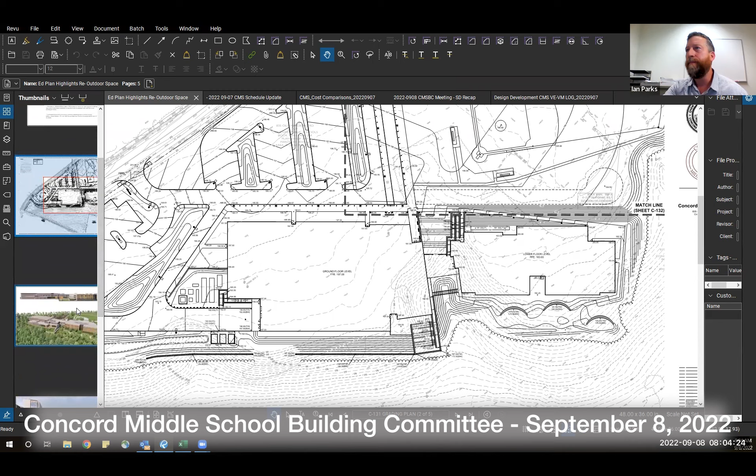One other example, and then we'll decide if we need to talk more on this. We have an outdoor concert annually at the high school where the band is set up outside, and the audience is staged on the pseudo amphitheater we have there. We were certainly hoping to replicate some of that at the middle school and have those opportunities.

Through the chairs, if I might. Chris's hand is up too, I noticed. Oh, sorry, thank you, I lost track with the screen sharing. So it was Chris and then Court?

Yes, Chris. Just to clarify what Lori's talking about: right now we're looking at a depiction of an amphitheater, a space that runs continuously from upper to lower. By contrast, if you had an upper space that were level, assume it's filled and level, and then you don't have the pass-through, you'd go through the building to get to a lower space. So for people to see the concept, we're looking at an amphitheater that goes under the bridge versus possibly an upper space that's level and a lower space downgrade on the backside of the bridge. Am I generally thinking about those possibilities correctly?

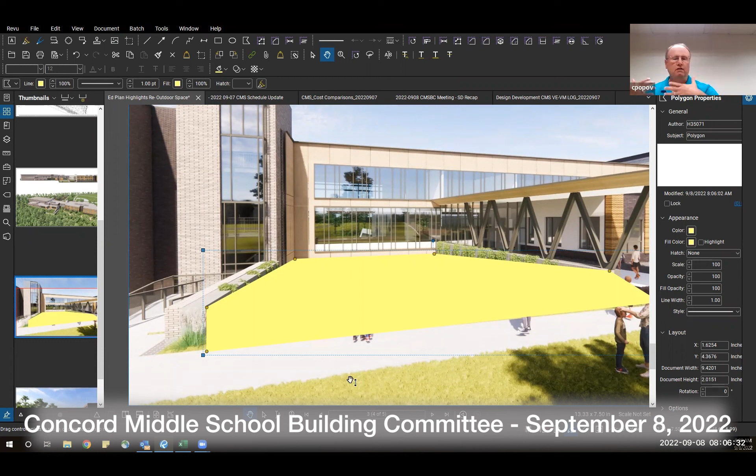And yeah, it's a very different concept from something where you get to pass beneath the bridge and have movement, or as the architects like to say, communicating from the front and back of the building via beneath the bridge.

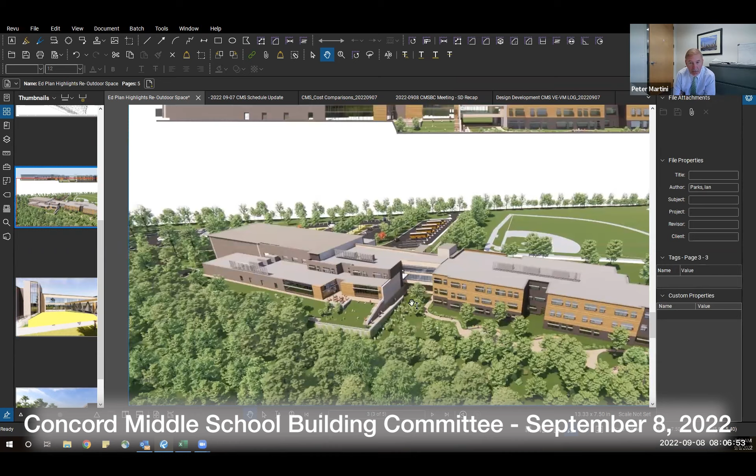Ian, if I may, I think Chris was also talking about the back sides. This is the front side. And so we need to, well, I think there's three things we need to make sure we're talking about with this.

One is, if we decide to fill in that space, and I can talk a little bit more on that, are we going to replicate what is right now needed for the ed plan out back? So it's going to be value engineering of that.

So that's number one. Number two, I think Lorraine's going to really need some direction here, because it's interesting to hear that space—we might be thinking of using the space under the bridge for square footage of the building, which means we would have less square footage somewhere else on the building, which now Lorraine's looking at kind of redesigning the real workings of the building.

And there's a lot of ways to do that when you start moving square footage around. I think that's hard, so I think the committee needs to let us know how many options we want to be looking at here, because that starts to get into a whole new design.

So what I would say is, again, if you want to get us a number on this, this is not a real difficult situation to do with some elevations and some structural information from Lorraine. Our independent estimators can put together a price on this.

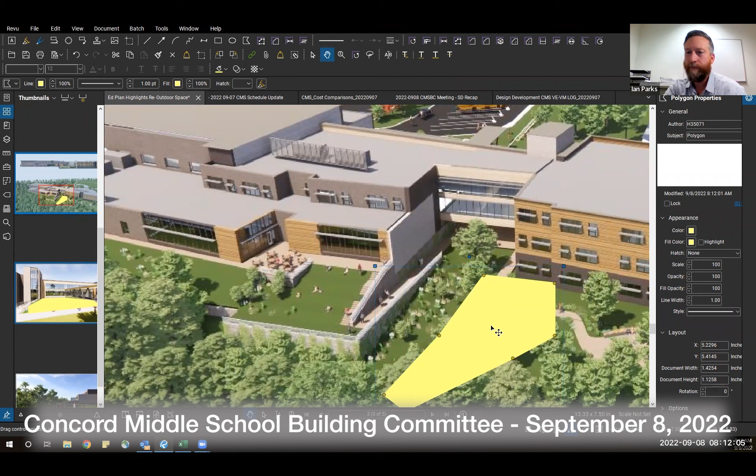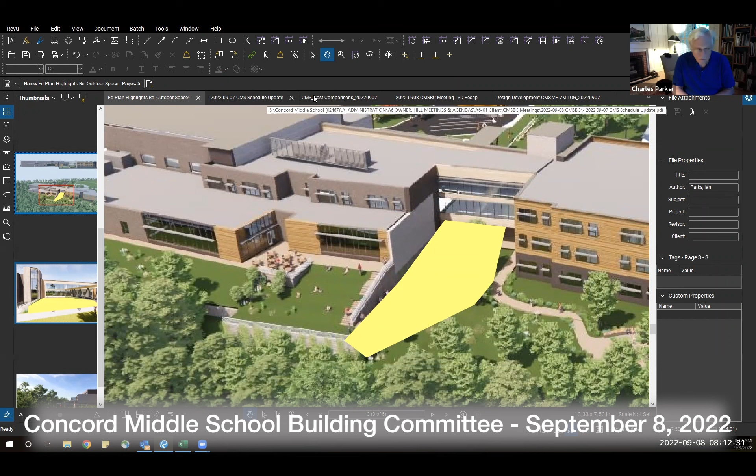Charlie, yeah, there's a couple of things to also consider when this analysis is done. One is there's an exit door from the instructional wing at the ground floor, and a decision would have to be made whether to retain that. Were you to do that, you'd have to have an interior wall probably under the connector that would enable that door to operate and have an exit way to get through there.

Second, I don't know that we've ever really discussed the seating structures in the amphitheater area. That's always been presented as a grassy area that goes down the hill and kids will go in there. Maybe that was discussed and I don't recall it, but it would be good to understand what's going on with that and what the cost impacts are of eliminating those expenses were we to fill the area and look for a different solution.

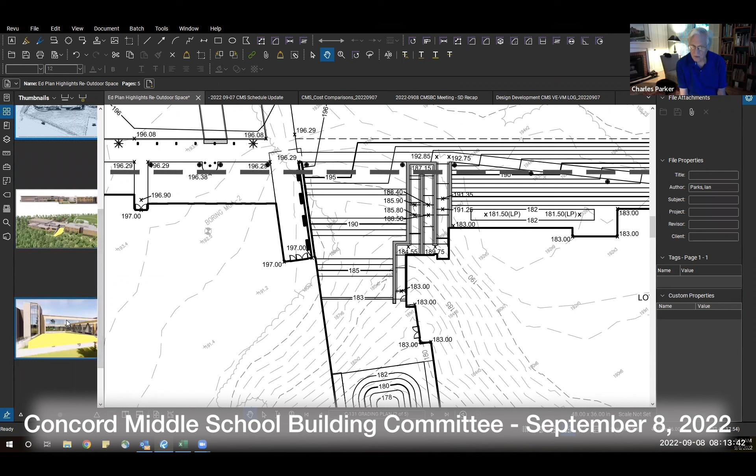In other words, you've got these bleacher seats, not sure what's underneath them. It looks like there's grass on them, but it really couldn't be grass, that probably wouldn't work. So what is there? How is that structured? Lorraine, can you speak to that?

As far as the proposed design? Charlie asked whether it's grass or concrete underneath. Sorry, Charlie, I think your audio isn't working, I can see your mouth moving but I can't hear you. We'll give Lorraine a minute. I'm here, I can answer any questions about that area. Charlie, could you repeat what you're looking for? He was asking what the actual material of the seating and the vertical members holding it back are, I believe, Charlie.

So this is just simply a lawn terrace. We add fiber to the soil material in order to get that sloped area, that sort of 5-to-1, 6-to-1 slope where it terraces down. So it's literally all just a lawn slope area, there's no structure necessary or involved to create that lawn terracing that you see here and also in the back area. So there are no bleachers. That's correct, no bleachers.

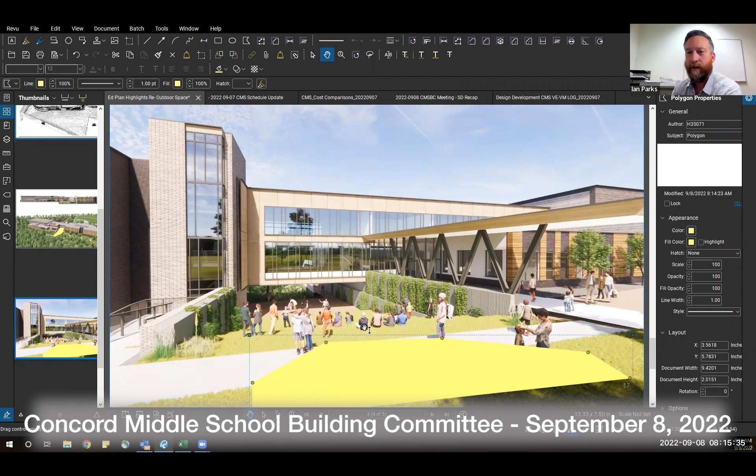Can you hear me now? We can hear you now, Lorraine. A grass slope, which is a pretty simplified design. That's correct, that's accurate, it's like sitting on a grassy hill. Exactly, you could have integrated tiers, integrated steps, concrete retaining walls, things you're not seeing here. Again, a slope down is a pretty simplified design. That's correct.

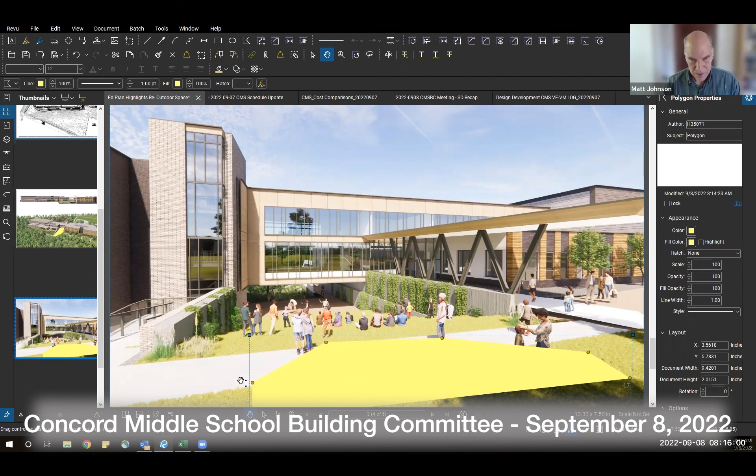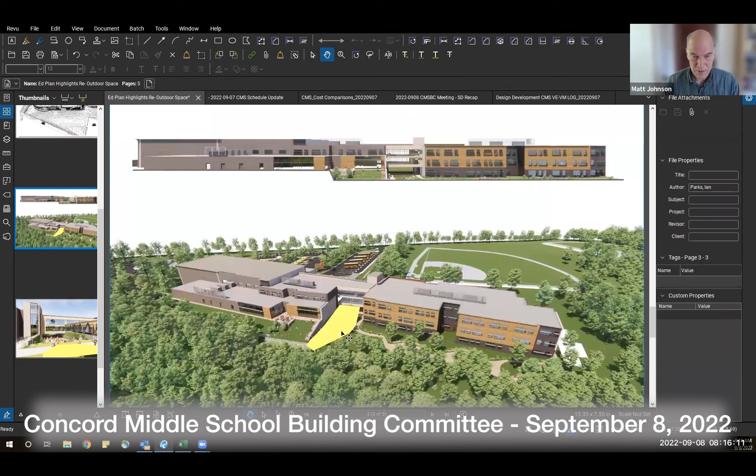Matt Johnson, thank you for clarifying the design. Team, what I was imagining was that space, rather than filling in and requiring a lot of fill in the back, if that lower area was usable building space, it could be quite a large space. You could see it extending out beyond where the bridge is now in the back. It could actually simplify the access from the cafeteria, the door out to the back, all that stuff.

I don't want to be an architect here, but I'll just say it, I think it could be cheaper than putting it on grade to actually create space under there and take space from somewhere else, because you already have the grade that's going to open up that story of building that could be put there, right in the middle of the building, where it's accessible to all kinds of different activities.

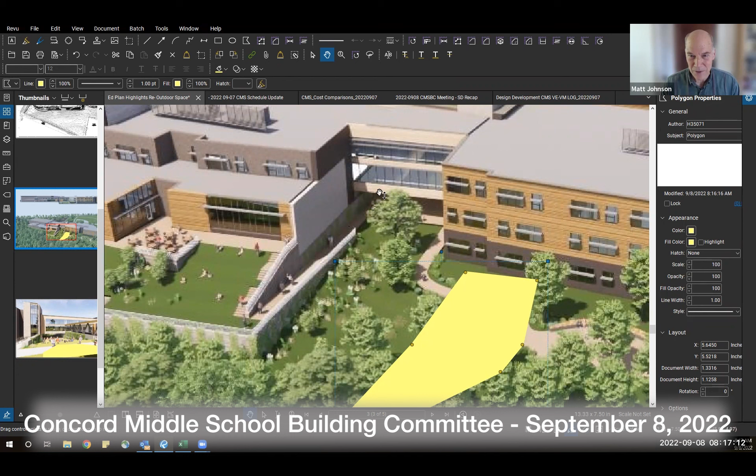And then the amphitheater could go behind it if necessary, grass amphitheater. I do wonder also under the bridge—because of course it's total shade, it wouldn't be grass under the bridge, right? So you've got grass coming down in the front to the bridge, but then under the bridge, what is the treatment there? It's going to be high traffic and low light.

Yeah, it's concrete only. This is concrete. Yeah, just sidewalk concrete, for lack of a better term. Okay. I just, people need to know what that's going to look like, I guess.

So Matt, if I can get some point of clarification here. We've got two alternatives that the committee seems to be talking about. One is just filling it in and not having the walkway under the bridge, changing some of the retaining walls. But the other is, Matt, it sounds like you're proposing that we take space from somewhere else in the building, square footage from somewhere else in the building, and move it underneath the bridge. So you're adding, let's call it the nurses and the offices or a music room or something underneath the bridge. That kind of space.

Yeah, and again, it could be deeper than the bridge because it could go out to where this wood bridge is, if you will. I don't have the expertise to know. That's really what I'm fundamentally getting down to—our VE and VM so far have been little things here and there. I'm just trying to say, what are the creative design alternatives that could really change the game a little bit here? This is one.

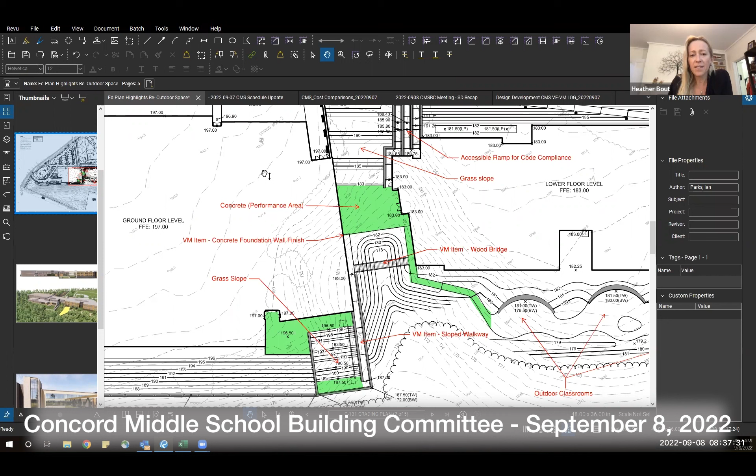I was just going to weigh in on the question you asked, which is, should we be relooking at this? And I guess I keep coming back to the fact that time is money. Lorraine or Ian, please correct me if I'm wrong, but I thought throughout this conversation we've heard from both Hill and SMMA that it didn't seem likely that re-looking at this was going to end up a big savings. So I feel like spending a lot of our time and money now on them redoing it for something they don't think is likely to save money, I'm just not sure that's a good use of time, added to the fact that, as we heard from Lori, this is part of the ed plan.

I want to be very careful that it's one thing to say we could have a performance space, but not have it sloped. If we just have a small flat grass space, it's not really a performance space because you can't see the performers. I want to be careful about protecting what we've agreed to protect in the ed plan. I think Steve's comment made sense to put this on the list of things we'd look at in detail if we have to bring the budget down to 102 again. But I don't feel like we're going to get a lot out of putting time and money into redesigning this now. Lorraine, Ian, Peter Martini, correct me if I'm wrong.

When we first started this conversation, it was what would this area look like if it was filled. Running through the logic of that is exactly what Peter was alluding to: you're now taking an existing sloped area and filling it, so you're spending money to fill that area and spending money to put in foundations underneath the bridge. Thinking through the estimating side of it, it's probably a fruitless exercise. It's probably a cost neutral change in our minds without having the estimators involved and actually doing the legwork.

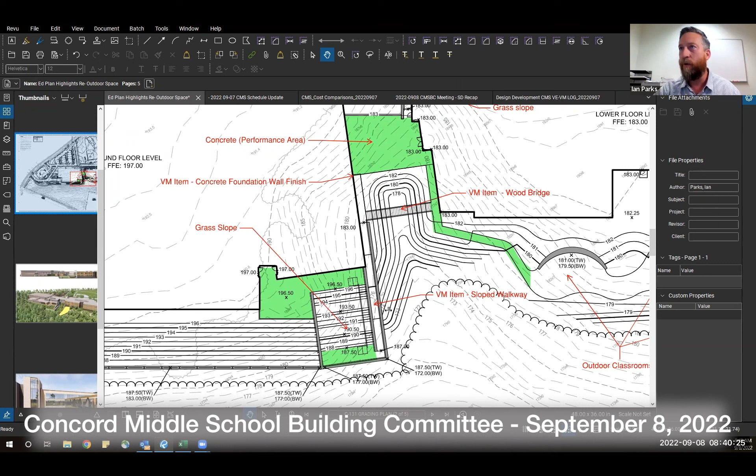So the alternative is keeping the space as is or modifying it to some degree. We can go through all these features—if you're going to keep a sloped walk here, which is a very simplified grass hill, there's not too much to change. You have to keep the accessible ramp for code compliance, so you can't really change that if you're going to have a sloped area. This is intended to be the performance area, and that keeps the integrity of an outdoor space for use. Looking at value management, some of the initial thoughts were removal of the wood bridge, removal of the sloped walkway, and changing the concrete foundation wall finish. That was a start towards maintaining some of the space while integrating value management.

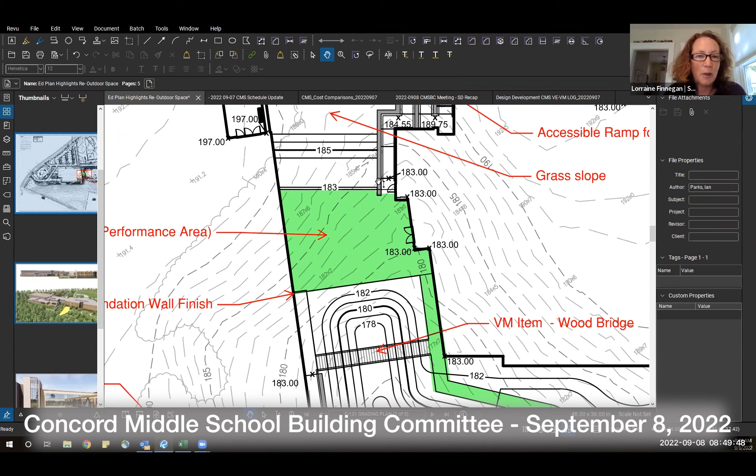We're not going to put the nurse down there. We're not going to put medical. Getting an ambulance down there if someone's injured is not what we were going to do. So you're not going to move. You need to keep guidance with the administrative suite. So there's adjacencies that are super critical for this project.

In addition to that, there's a special education classroom right next to it. So we're very intentionally not placing all the special education in one area. There is a real desire, and we've reviewed this with CPAC - this is the way the MSBA works, this is the way DESE works. You have to distribute those spaces.

So just quickly looking at the plans, I had a couple of ideas, but I really would need to meet with Laurie and Justin and make sure that anything I propose down there is something that's acceptable to them.

But Lorraine, where's the money? Where's the savings? Well, I have to carve that square footage out of the building. Right, so that's why I'm saying it's a jigsaw puzzle. If I'm taking a piece from over there, I have to put it over here. So there's no savings of square... sorry, there's no difference, there's no savings of square footage.

It's the same square footage. It's just, to me, building something someplace else. So the issue here is: is it less expensive to build that on grade? That's where this started from.

Okay, I'm going to ask Matt Johnson to speak, and then I think our committee needs to vote. Yeah, I'm just putting that out there.

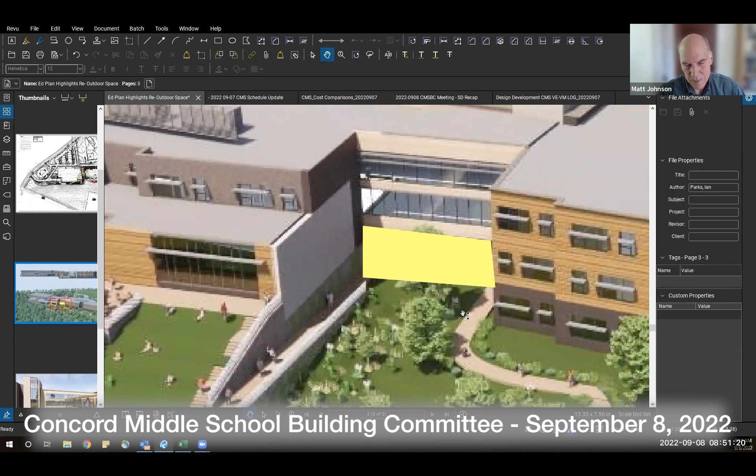Matt: My assumption is that structure that creates a contiguous building that follows the contour of the land like the rest of the building does there, and perhaps even could be bigger or deeper than the bridge itself at that level, would be cheaper than the equivalent space that included a bridge.

Because the bridge requires all these additional elements of landscape, ramps, steel to support the bridge, etc. You just make it part of a contiguous building all the way across, as opposed to two buildings connected with a bridge. And yeah, it has the same square footage, but now it's all just part of a contiguous building that per square foot, hopefully, would be less expensive than this.

Now, my goal is not to have a specific design. It's just to say, here are things that from a layman's perspective look like they cost more. And if they don't cost less to change, then that's not the right answer. It's just trying to say, what are the creative ideas - and not hearing a lot of other big ideas, I just threw something out there. Again, I would love to hear other creative ideas for design that would get us substantial savings. I'm just grasping at whatever straws I've got.

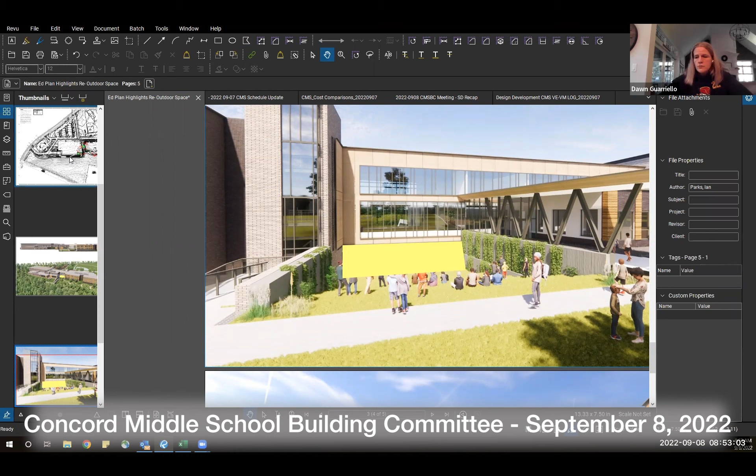I appreciate that, Matt. I'm going to ask if anyone has any motions that we might be able to vote on so we can move on from this, because we still have plenty to discuss today.

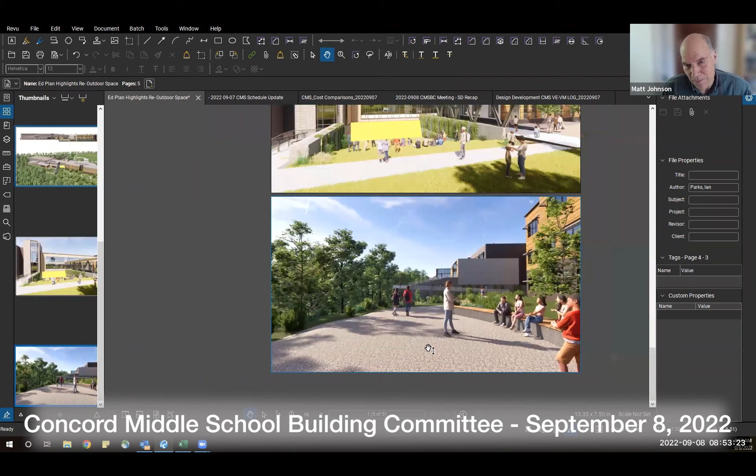Well, I guess I'm going to go ahead and just move what I would like to see, and if it's not supported by the committee, then that's fine. What I would like to do is ask SMMA, as they have offered, to explore a design option that would use the space currently taken by the performance space under the bridge, and perhaps some more, to displace space elsewhere in the building, with the goal of having a total lower square foot cost, and centralize some space that might be elsewhere in the common wing, in order to simplify the design and perhaps save money.

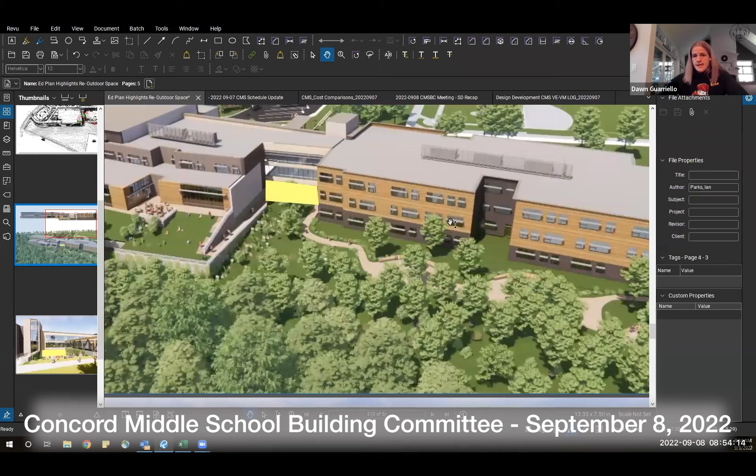Yeah, I'll second it. Okay, we have a motion and a second. Any discussion? Hearing none... oh sorry, go ahead.

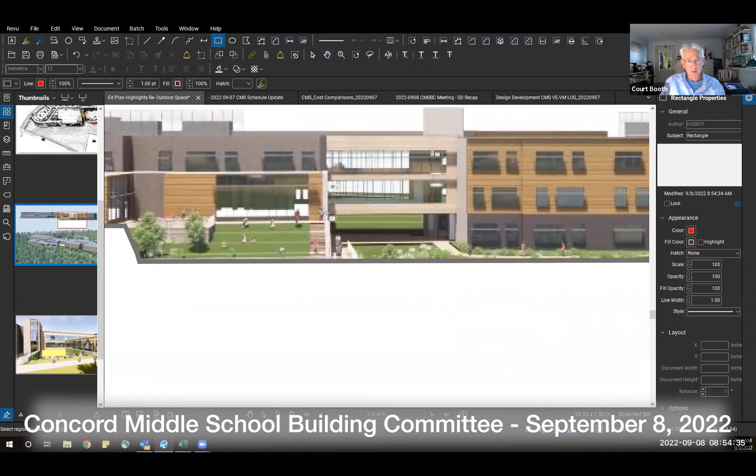I think it is a responsible move, in that we are in the conditions we're in, number one, and number two, that we, to Matt's point, simply don't have other good options at this point. And if this is the best one, I think we have a responsibility to really take a genuine look at it. Thank you. Thanks, Steve.

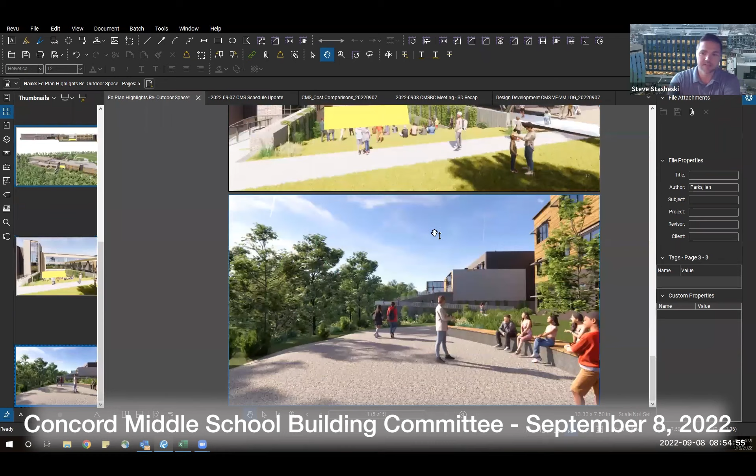My question would be to Matt in reference to the select board timeline. If we were to ask the professionals to discuss this and provide a sketch, review it with Lori, then send it to the estimators, then provide some kind of a price, I think that might take longer than our original timeline for the select board to vote on whether a town meeting would be supported. So if we move forward with this, knowing that the building committee is moving forward with looking at this and potentially other options to significantly reduce the budget, would you say there's a good chance the select board would continue with the existing proposed timeline in the warrant we requested, so we can keep the ball moving on both fronts?

Well, I can't speak for my colleagues, but all I can say is what we heard out of the select board meeting is they wanted to see a serious look at major VE. And I think voting for this would indicate that the committee is open to those kinds of discussions, so that would be encouraging. But again, I can't speak for what my colleagues will say. Thank you, great question Steve, and thanks for your response, Matt.

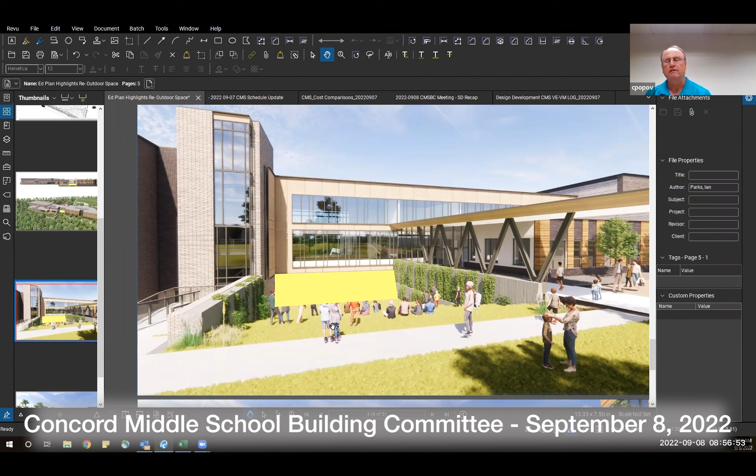Chris? Yeah, just for the discussion on this motion, given the possibility of this kind of build out beneath the bridge, which would effectively eliminate the bridge, would it make sense as an alternative to say, what if the only possible change would be to level the front, so there is no slope there? Yes, there's a fill cost, there's fill on site. So if the only thing to think of is we're not going to build anything beneath the bridge, we'll leave that open for the rear part of the house, as it were, and then have that front area all level -- does that make sense? Does it add much more work, or is it a reasonable alternative? Just something to think about.

I don't know if we want to amend the motion for that or put it as a separate motion. I'm just not sure what's the way to keep it clear. Well, I'll assume the motion will stand unless someone wants to revise it or make a second one. Chris, how's that sound? Let's get through the discussion and then we'll figure that out.

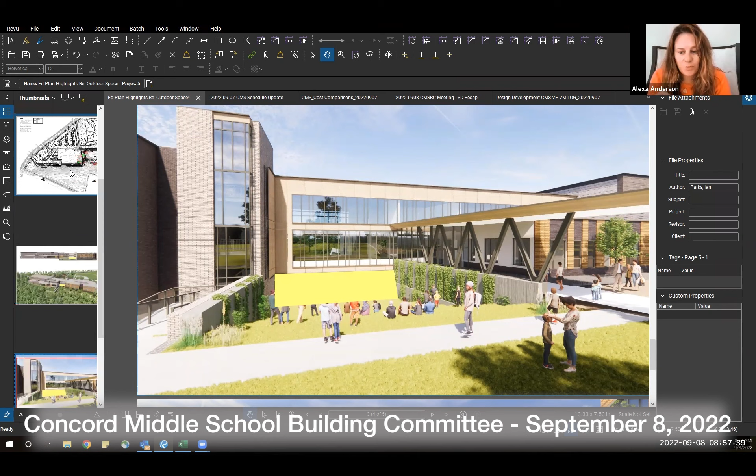Alexa -- my next question is, the part of why I feel like this is not a responsible path is we do have things on our VE list that would get us, if not entirely to the original budget, very, very close, and they are the gym and the auditorium. The superintendent said she would not go to bat for those spaces because they don't adversely impact her ed plan. So why are we pursuing something in a totally different direction when we do in fact have things on the value engineering list that will get us there, and they're on the community side of the building? So to me, that is at the crux of why I don't feel like this is responsible. I also feel like our professionals can't be more clear that this is likely to not save money. So those two things combined, I couldn't disagree more that this is a responsible route.

Thank you, Alexa. Heather? I'll be brief because I agree with most of what Alexa said. I just need to point out that I do not think voting to do this and redo it would be a sign of being willing to look at options. To Alexa's point, we have others, and I think we as a committee have been looking hard at options. I agree with what Pat said earlier about the fact that that effort has been going on and is continuing. This one, we're being advised by our professionals that this is not likely to be a money-saving option. In fact, to me, that means we are wasting money by wasting time and professional hours on doing this. So I feel it would be irresponsible to look at this option.

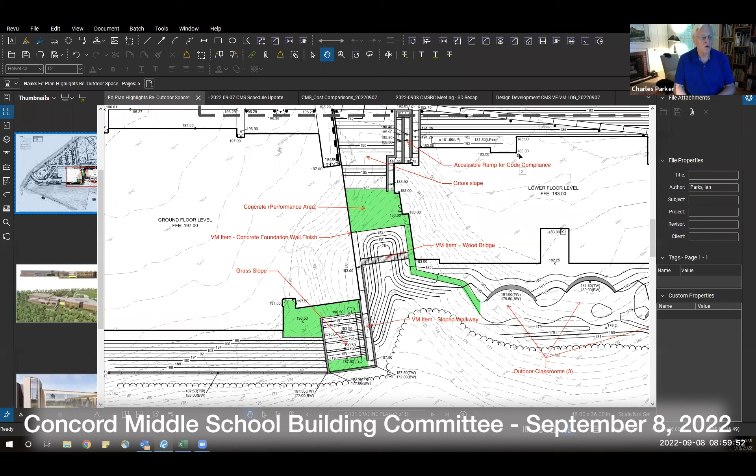I had a colleague take a look at this, an outside person who went to his own estimators on the whole concept. I didn't prep them with any information I had, I just asked, and they had all the detail, the slides, and went through an estimation process. And they said no, this is really not going to save any money. You're just trading one set of items for another. So no money to be had here.

So if we're doing VE, this is not a candidate. In fact, it takes attention and time away that we could be spending on other VE items that might be more fruitful. So I agree with Alexa on this point, and with several others who have spoken.

Great, thank you Charlie. Peter? Hi, yeah, I'm also going to weigh in there. The only question I have, to me, is this is a perception thing.

My question is, I guess, to Matt, is it something that the selectmen would view as valuable to have gone through this, even given the fact that we are seemingly comfortable that there really isn't going to be a cost savings from what we can tell? Is it important from a perception standpoint, given the bridge and that whole area, which seems to be an area where people think there might be able to save some money?

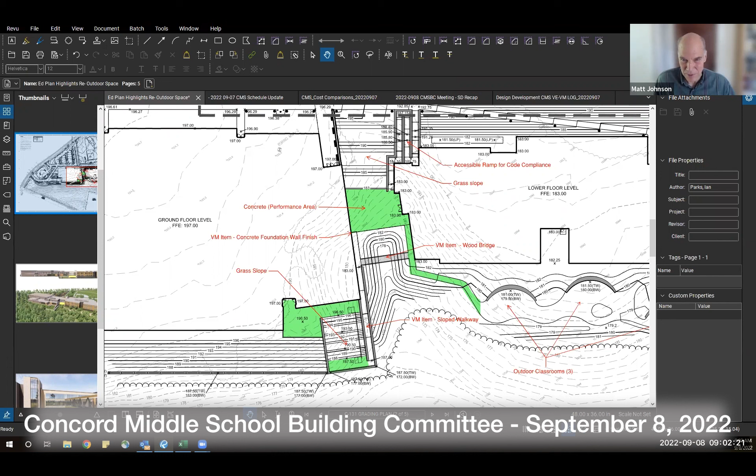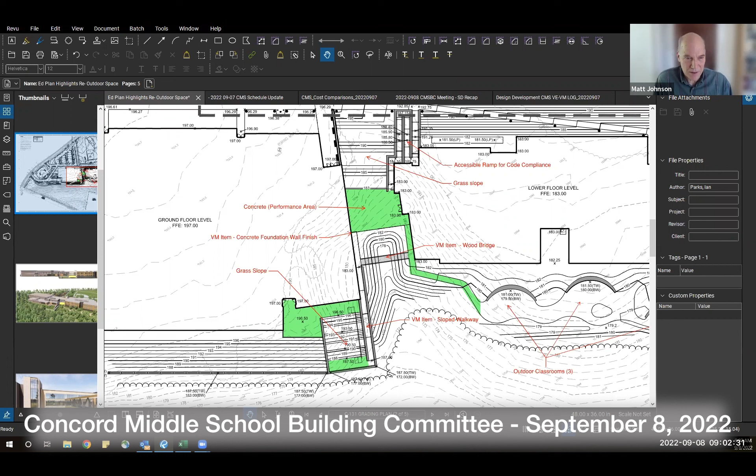I just believe that there should be something there. But if people are not committed to pursue that, then that's where we are.

Thank you, Matt. I'm going to call for a vote. I think we've discussed this substantially today. Alexa, how do you vote?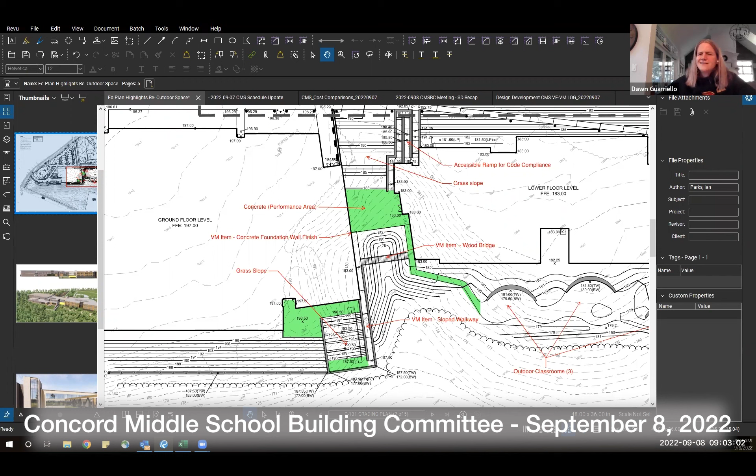No. No to studying it. Correct, no to studying it. Got it, just making sure. The motion was to ask the professionals to look at moving built square footage under the bridge as a potential cost saving simplification of the design. That's the nicest way to put it. It doesn't have to match the size of the bridge, it could be bigger or step out or in. So Alexa's a no still, I assume, unless I heard you wrong.

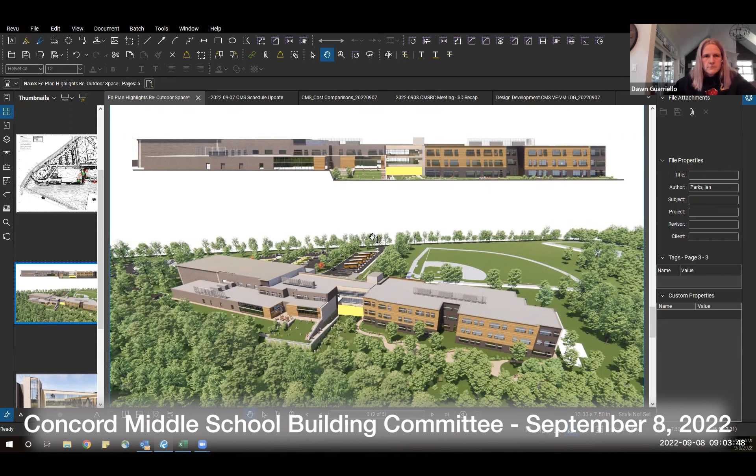Court Booth, yes. Heather Bout, no. I was going to keep track here. Frank Cannon, can anyone see Frank? Let me go look. Thumbs up or thumbs down, Frank? Thumbs up, thumbs down, Frank, talk to me. Down, did I see him correctly? Okay, you're a no, thank you Frank.

Who's next? Justin not voting. Peter Fishalis. No. Okay, I'm a no, only because I think I agree with our professionals that it won't save anything. I think we have other prudent options to consider here.

Lori Hunter, sorry I'm at the row so you're going to hear the kids. I'm a no. That's okay. And I know you need to jump off for a few, Lori. Yeah, I do for a few minutes. Yep, I understand. Matt Johnson, aye.

Okay, next voting member, Pat Nelson. No. Chris Popoff? No.

Charlie Parker, no. Matt Root, I'm a no, no. And Steve, no. Okay, looks like 11-2. The noes are in favor, or the noes went out.

Okay, so with that, I think we have a very long list of other things we need to get through today, but I appreciate everyone's comments, information, sharing of ideas. This is all very helpful and hopefully will lead to our building being successful. So thank you all for spending the time talking through that.

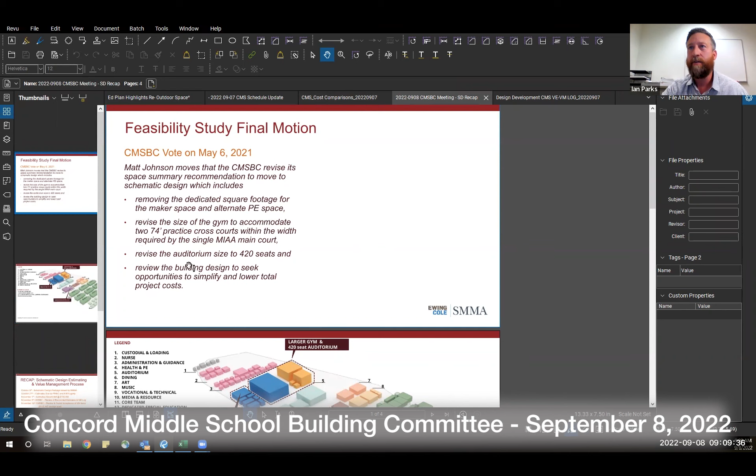Just to recap some of the things that went into that cost, some big decisions related to project scope. Back in May, at the end of feasibility, we were looking at some changes related to scope: removing the dedicated square footage for the alternate PE space, that was done; revising the gym size to create a larger gym for the 2 practice courts, that was done; revising the auditorium size to 420 seats, that was done as well.

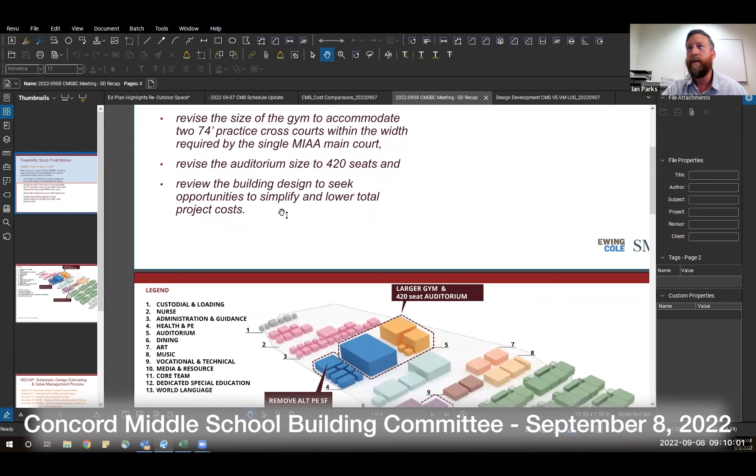And then, sorry, I skipped over, it's makerspace and alternate PE. And then just simplifying the building to try and lower total project costs.

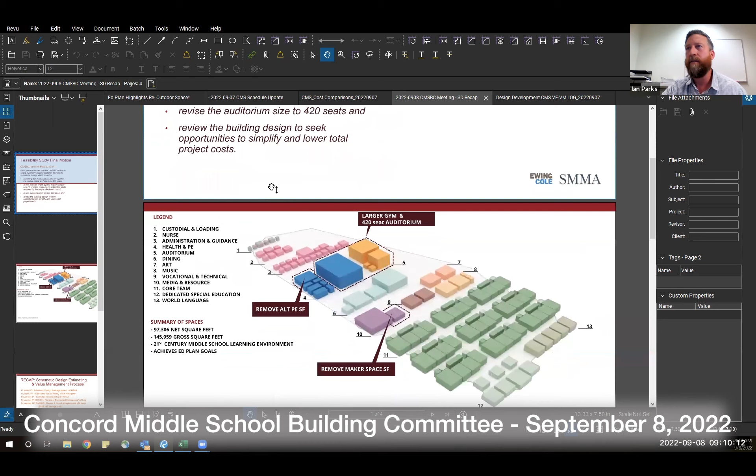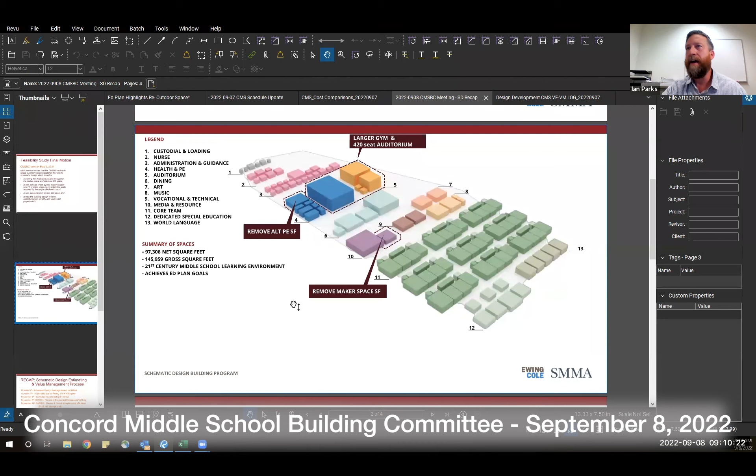So these were some of the areas, just to outline the summary of spaces that were changed at the end of feasibility. That was a long process of going through that, and you guys made some tough decisions last year.

Then we got the estimates back, and we went through the schematic design completion. We gave it to the estimators, had them do their due diligence, and then we went back to this idea of we're over budget and we need to get back to budget. So we did an additional value management exercise.

There were some savings realized on the November 12th meeting, and VM that was accepted, close to 900,000, over 900,000. Then some additional VM was accepted on the November 18th meeting. So we got that $1.7 million in savings total for schematic design value management.

Some of the highlights for that were stockpiling existing soils on site, reducing wood look metal ceilings, eliminating wood paneling in the media center, eliminating CMU walls in back of house spaces and gymnasium, reducing the roof screen coverage on the roof, and removing 934 gross square footage from the building footprint, which was in the gym area, and reducing height of glazing of the connectors. Some of those were the bigger value management items in that $1.7 million.

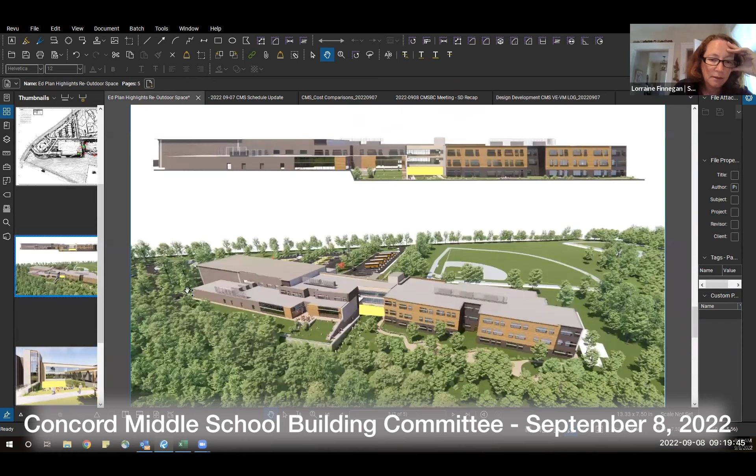Lorraine, can you go over this one again? This is the walkway feature? That is the south side of the dining commons - that's the ramp that goes down to the performance area we were just talking about. It's still in that rendering you showed earlier, coming from the dining commons down to that area. So it's eliminating the connection from the dining commons to the lower area - that's a big ticket item.

Reducing ceramic wall tile in the toilet rooms to 8 foot on wet walls only - so this is taking out tile and putting in sheetrock, impact resistant sheetrock and epoxy paint. This is 274,000, but it's a big change to the bathroom areas.

This one here is reducing the construction schedule by 2 months, and that is a savings realized of 270K for general conditions - just less time and management effort for an 18-month schedule in lieu of a 20-month schedule.

Reducing auditorium and specialty space by 25%, and the AV systems by 25% - so a decrease in your AV systems, that's 265.

This is a change to ceilings - changing wood look metal ceilings to tile, savings 189,000.

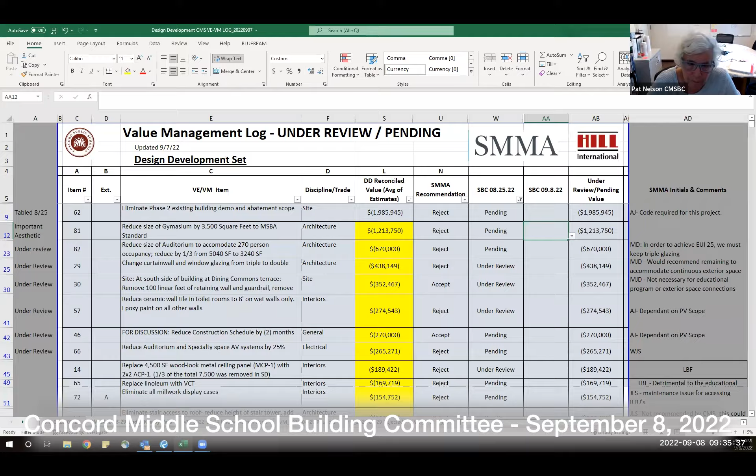Yeah, well, also I could imagine for 81 and 82 a more modest proposal of a 350 seat auditorium and a 7,000 square foot gym. Well, Matt, this is just it. We need to figure out what we want to represent to the town as our recommended strategy for this building. That's what we need to do. And it may be this number, it may be a different number. So we need to figure that out.

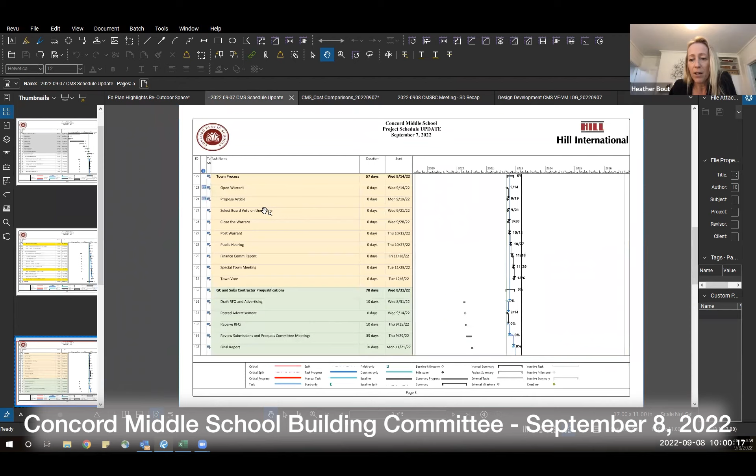But what I wanted to comment on was the upcoming select board meeting. Back to what I brought up earlier about timing—if the select board is discussing whether to start the process for town meeting now, I think it's important as a committee that we reiterate time is of the essence. If we don't know if the special town meeting is happening, or the process doesn't start soon and we can't move forward, this whole thing bumps back. Even one of the VM items could become not an option, because that's about shortening the time frame by 2 months. And if we're pushing things back because we can't have a special town meeting yet, we might have to be lengthening the time frame instead, which costs us more. So I wanted to bring up timing and see if we can reiterate to the select board that timing is critical for getting that special town meeting process started.

Thank you, Heather. I put up on the screen what we had for previous assumptions for the town process on the last schedule update. I didn't change this, and these can be refined a bit, but this was the general outlook for the process.

Okay, and we'll be sure to bring that up, Heather, and talk at length about what that means. Okay, so sounds like we have a lot to talk about at our next meeting as far as getting deep into what our, let's call it, option B scenario will be.

And if anyone after this meeting needs more information on any of these items, yellow or gray, please feel free to email Pat and we will ask the professionals to come with that information so we can have a fruitful discussion. I'm hoping that's the only thing on the agenda or the bulk of it, because I was hoping we'd get to more than we did today. So apologies that it didn't play out the way that we had hoped as far as getting deeper into discussing a lot of these.